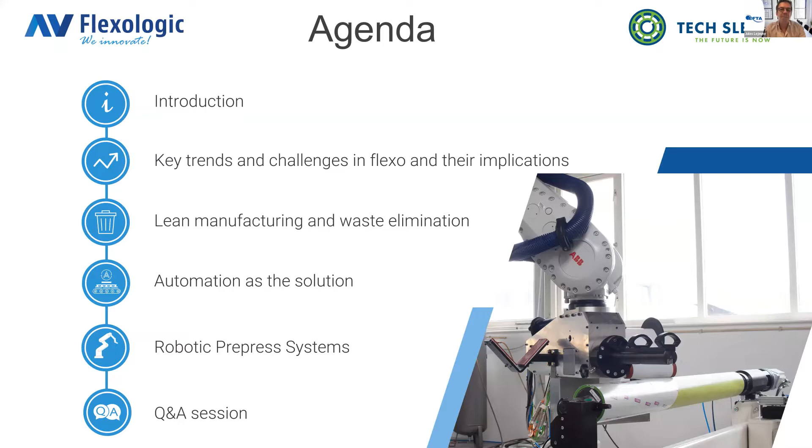As a quick introduction, AV Flexologic is part of the Color Control Group. AV Flexologic itself is a 50-year-old company already, and we are part of a group which is flexo focused. It's a family-owned business by myself and my father, Piet Otten, who many of you will probably also know. We are headquartered in the Netherlands. We have sales and support offices all around the world, from Thailand, US, Spain, Italy, etc. We have a large part of our production in Eastern Europe, in Cluj-Napoca, Romania, where we are quite deep in our own supply chain. We're also building a new facility there.

So we have AV Flexologic, all flexo, which is distributing consumable materials in the Benelux, Germany, and UK mainly. Then we have Tech Sleeves, which is a new company, 5-6 years ago we started it. We are producing and selling flexo sleeves worldwide. Then we have Leapfrog, which is a 3D printing business, the only one that's not flexo based, but still somehow printing.

We are based in Alphen aan den Rijn, obviously in the Netherlands, which is quite convenient for customers visiting us from all over the world, because it's quite close to Schiphol Airport. When they're, for example, on their way to Marcel from W&H, they stop by AV Flexologic on the way there, if they fly into Schiphol.

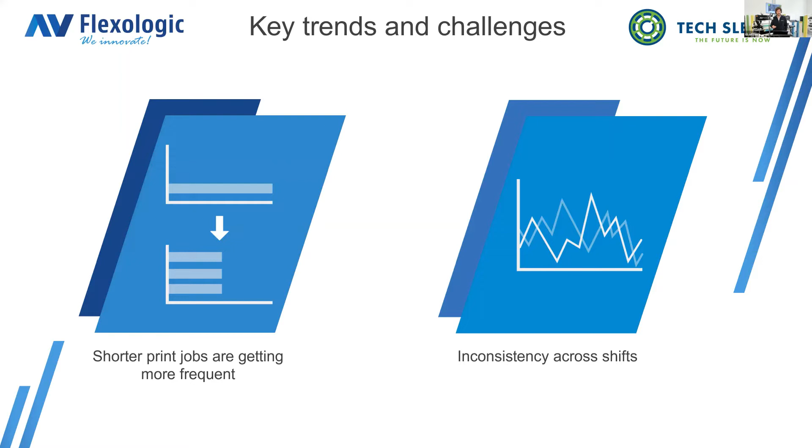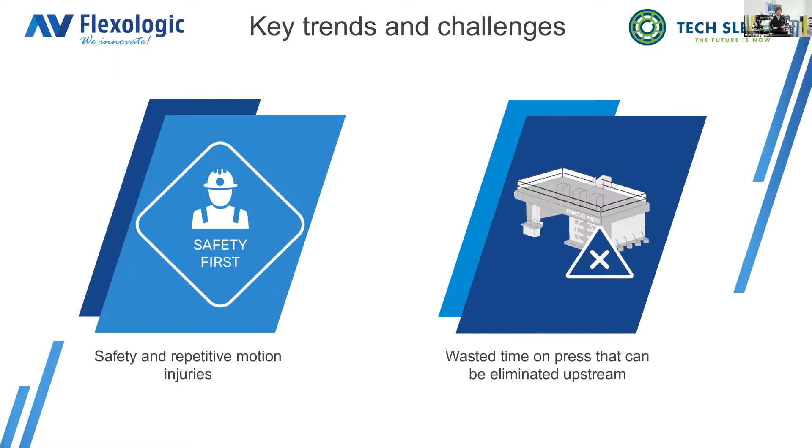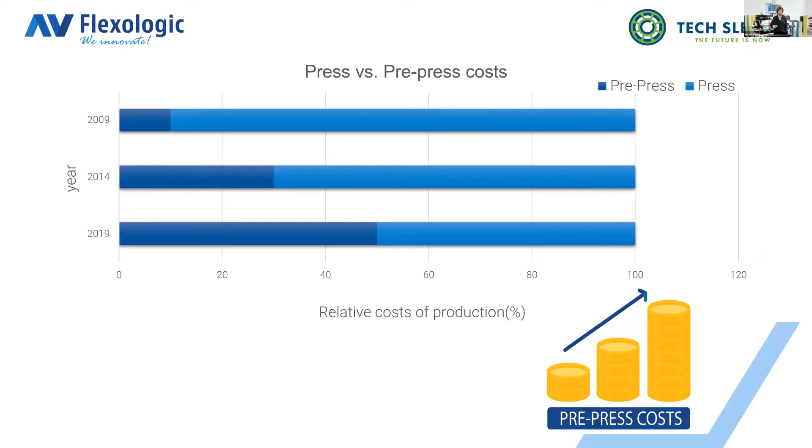What we've identified as key trends and challenges: we see higher quality demands from end customers. Lead times on print jobs are getting shorter, but shorter print jobs are getting much more frequent. This can result in inconsistency across shifts, because more people are needed in the pre-press department. At the same time, the staff is aging and retiring. It was really a skill in the old days to mount a plate, and those higher skill levels are getting harder and harder to come by. Putting pressure on the pre-press department also leads to safety and repetitive motion injuries. Putting more through a pre-press department can also result in wasted time on press that can be eliminated upstream. The relative cost of production over the years of pre-press versus press is growing due to these trends, and as a result, the mounting department becomes the bottleneck.

Now, incorporating into our basically business culture, both from a production and from a product technology standpoint, we really focus on lean. Many people ask, what really is lean? We say lean is simple, because lean is learning to see waste in any type of business process and eliminating that waste through continuous improvement. So we teach and train our people to see waste, and also we teach ourselves to see waste in our machines, how our machines operate.

Every second counts in production output. If you really look closely, most business processes are 90% waste and only 10% value-added work. When you look at what is non-value adding versus value adding, we try to optimize the value adding work and eliminate the non-value adding work.

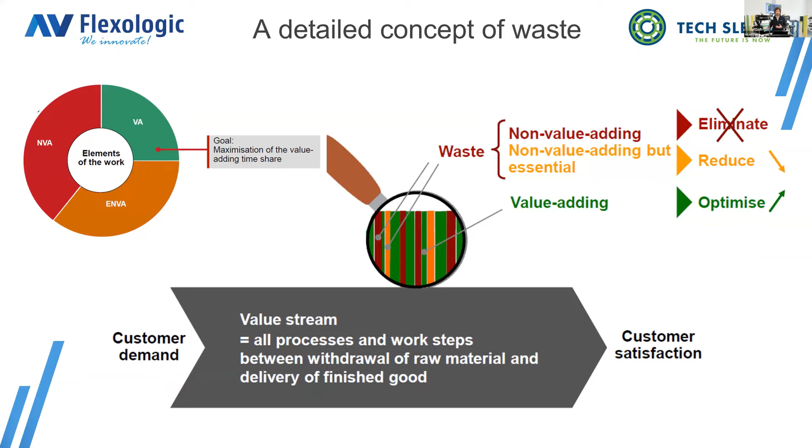When we look at a current value stream for a pre-press department in, let's say, a traditional manual mounting operation, when the customers or pre-press staff are mounting plates by hand, the total production lead time per sleeve is quite high, and there's also potential for rework because the positioning of the plate is operator dependent.

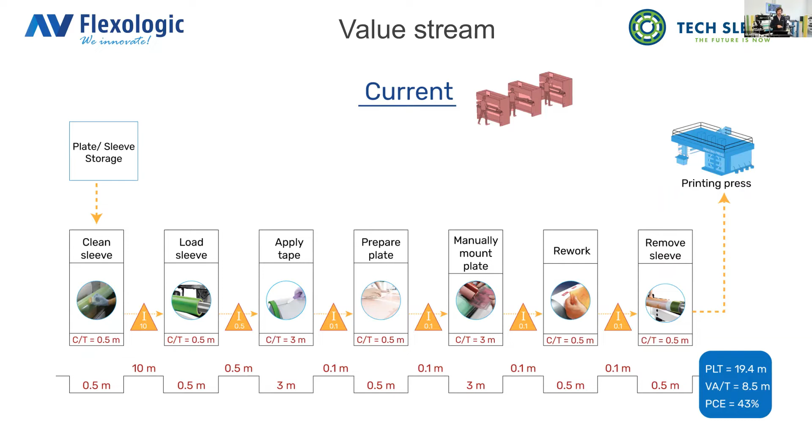When you compare a traditional manual mounting value stream to an automatic mounting value stream, you really see that you cut your time sometimes by even 70 to 80 percent of a manual mounting process, and you really increase your value adding time per operator.

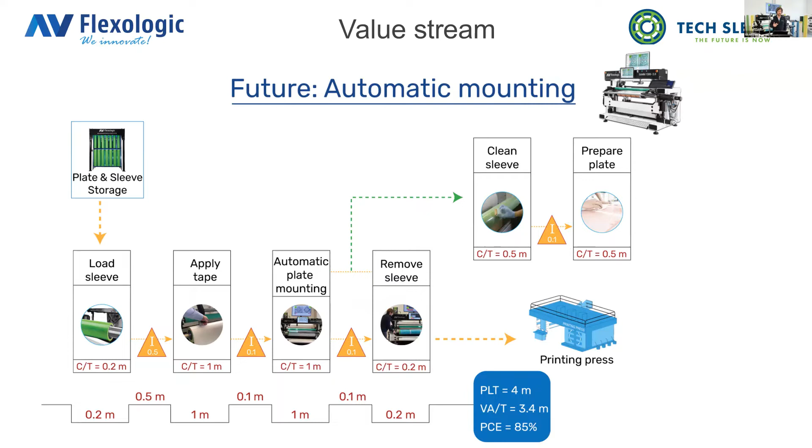Again, what is waste in your production? We have, for example, mounting mistakes which cause press downtime and require excess processing. Then the operator has to pull the sleeve from the press and go back to pre-press, and during that time the press is waiting for that sleeve to come back.

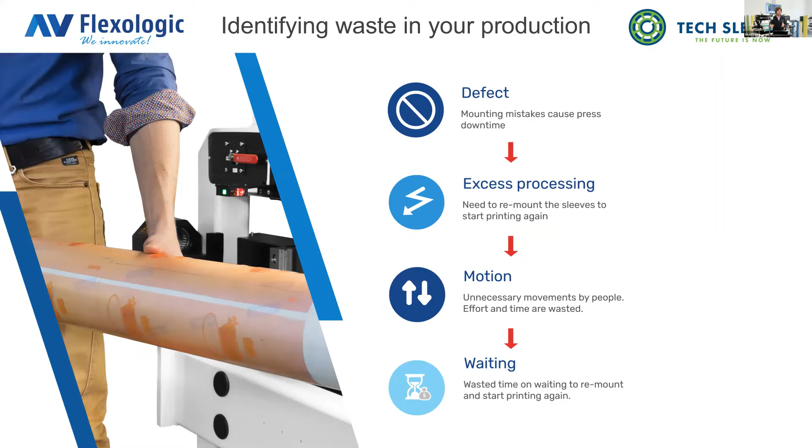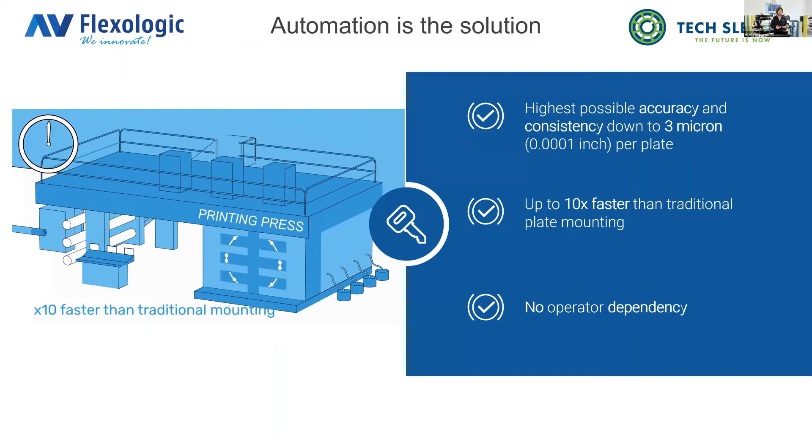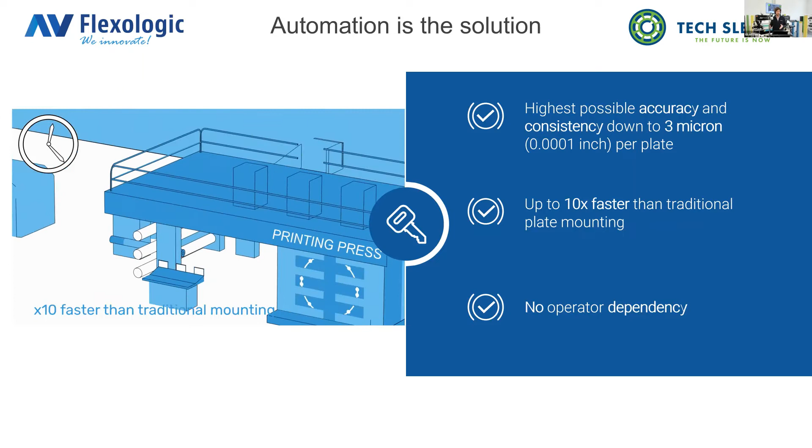We present automation as a solution. Automating creates the highest possible accuracy and consistency. Our latest machine, the FAMM 3.0, the third generation fully automatic mounting machine, is able to position individual printing plates down to 2 or 3 microns, which is very, very tight. It's up to 10 times faster than traditional manual plate mounting, and again, you have no operator dependency. We will show more in detail the fully automatic mounting machine in the next slides.

So we really present automation as a solution to eliminate waste in the pre-press department. You eliminate press downtime due to mounting mistakes, increase your productivity per operator so you have less operator time required per mounted plate, increase your press startup speed by reducing changeover times, and reduce waste material as well.

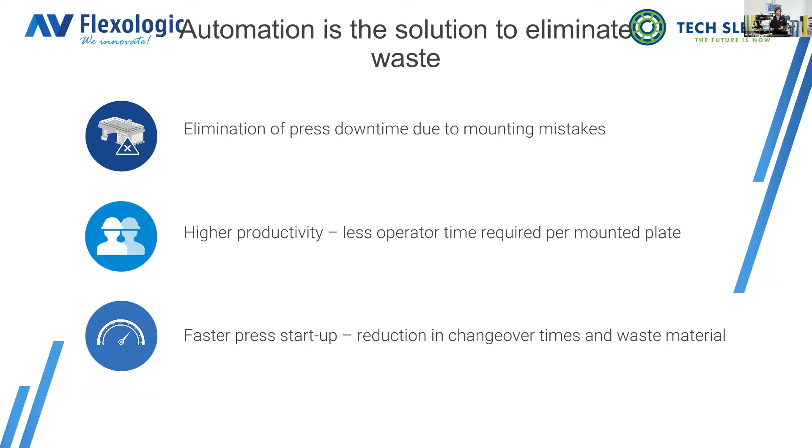At the same time, with automatic mounting, on the machine you see behind me, the SAMM 2.0, you have detailed quality control and reporting. So after the mounting is done, you can also take a snapshot and a measurement of the mounted plates, so you can make sure that they are within specification before they go into press.

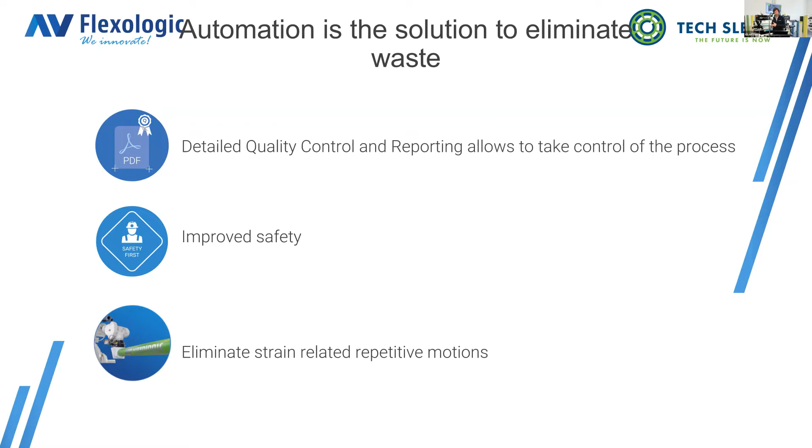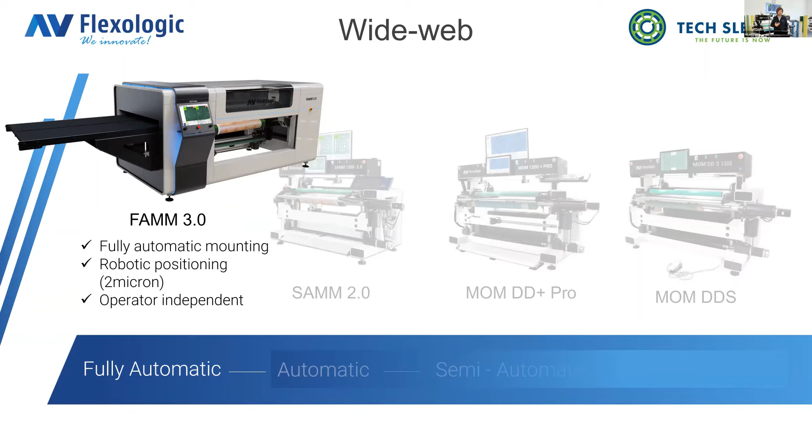And this is our full range of wide web flexible packaging plate mounting machines. Starting with the FAMM 3.0, third generation fully automatic mounting machine, we have over 100 of these machines worldwide. Robotic positioning, 2 micron accuracy, operator independent, every 30 seconds you mount a plate.

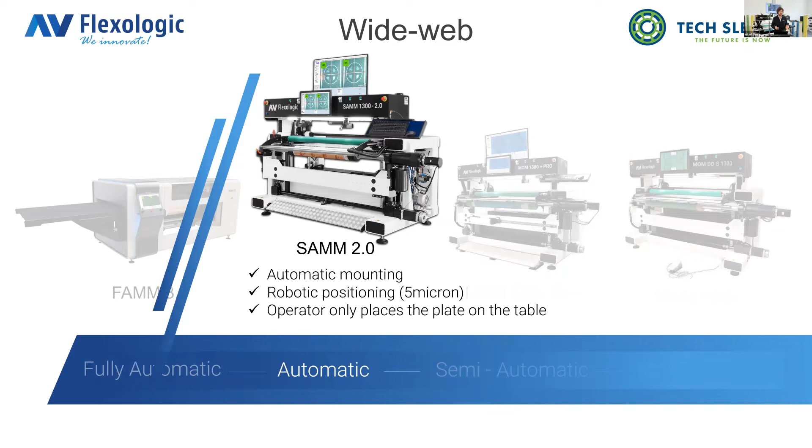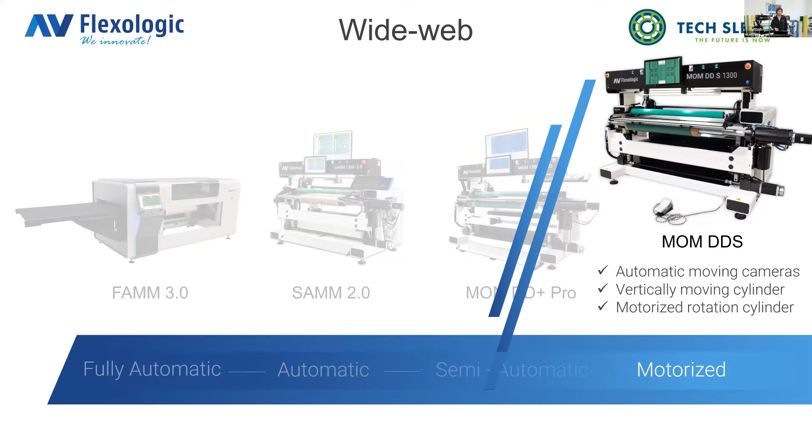The SAMM 2.0, this is our bread and butter machine. This is really suitable for 80 to 90 percent of Flexo printers. It's an accessible machine, and it obviously does automatic mounting. The operator really only has to place the plate on the mounting table, the machine takes over, does the positioning of the plate, and mounts the plate fully automatically. Then we have the industry standard manual mounting machine, the MOM DD Plus Pro and the MOM DDS for the entry level. So we have really quite a wide range of equipment.

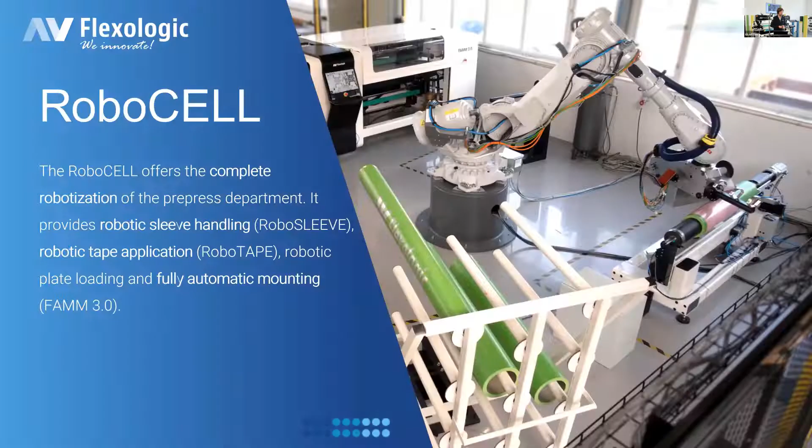We also have, on the narrow web and corrugated side, different options of mounting machines. But if we really look at the wide web flexible packaging innovation, the Robocell offers the complete robotization of the pre-press department. So we have sleeve handling, tape application, and plate loading, as well as mounting those plates on the FAMM 3.0.

So the FAMM 3.0, which I showed you before, this machine can be placed into the Robocell, and the robot can be loading those sleeves into the FAMM. We have different configurations of the Robocell.

Standalone robo tape, that's level 1, where we're actually manually loading the sleeve into the system, but you have the advantage of fully automatic tape application. We have spiral tape application, so basically you start at the same angle as you finish, so you have zero tape waste. There's no cutting onto the sleeve, there's no air inclusions, and obviously no operator manually applying that tape.

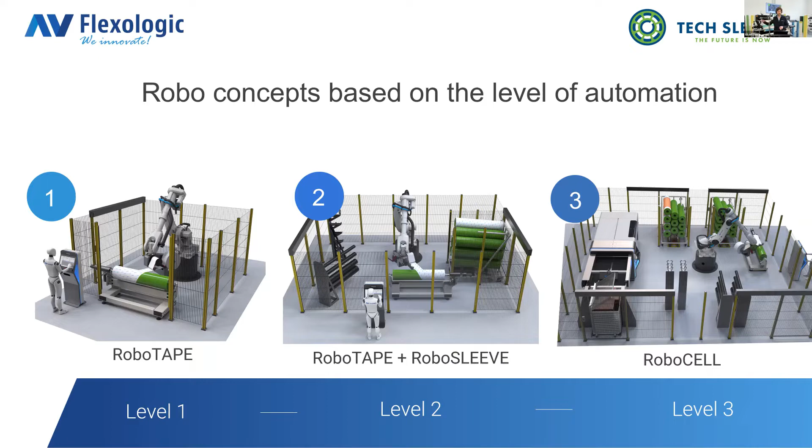Then the next level is robo tape plus robo sleeve. So the operator puts a sleeve cart with the full job into this cell. The robot takes the sleeve and automatically applies the tape, and when the sleeve is taped, puts that sleeve back into the sleeve cart. Then level 3, the full Robocell, the operator is putting the sleeve cart into the system. The robot takes the sleeve, applies the tape, puts it in the mounting machine. The mounting machine mounts the plate, and then the sleeve is placed back into the sleeve cart, fully taped and mounted.

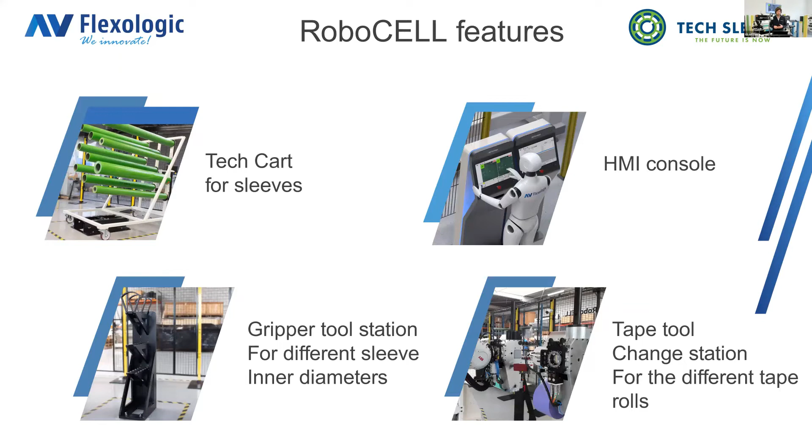So yeah, some features which I just explained. I'm going to quickly show you a video of the different features and options of the Robocell.

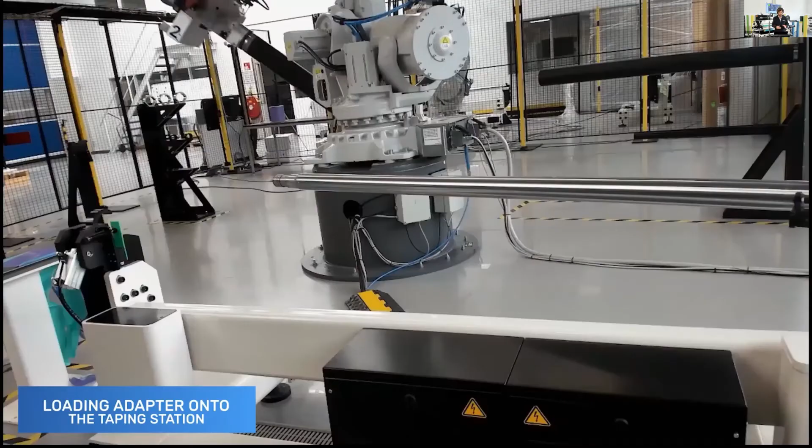So it can also load the adapters. We have a separate adapter station for different internal diameters and lengths. The system can also accommodate different lengths of sleeves within the system. So if, for example, you have a 1300 and a 1700 wide press, you can accommodate both into the cell.

So now it's loading the adapter into the taping station. We also have different taping tools, so for customers which have multiple tape hardnesses and densities, for example if you have your process colors and your solids, you need a different tape. We can real-time change the tape tool using a tool change system, as you can see here. We have the ability to go up to 4 different taping tools.

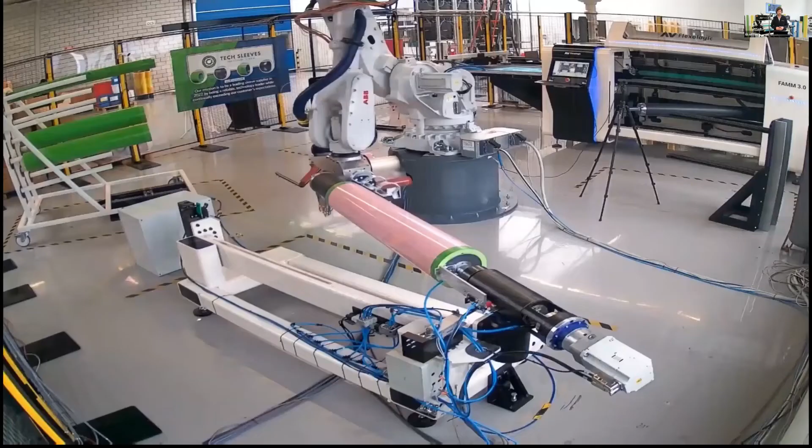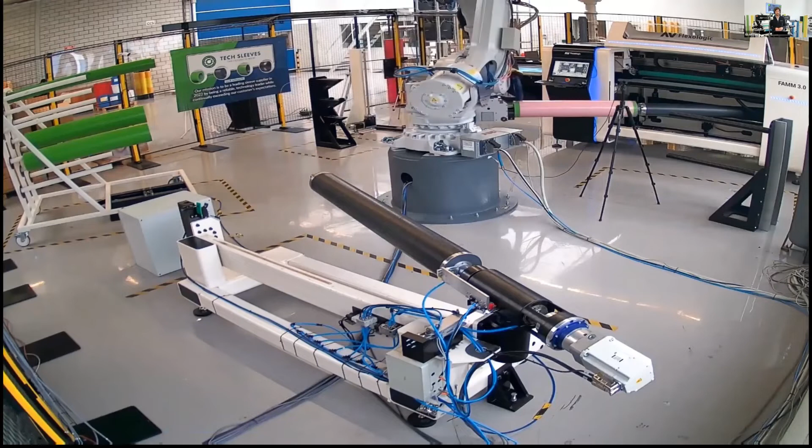So now you see the RoboSleeve part actually loading the taped sleeve into the FAMM in the back. We see this system has become very popular, especially in areas where it's hard to find operators, customers which have 3, 4 presses or more, and which are growing essentially.

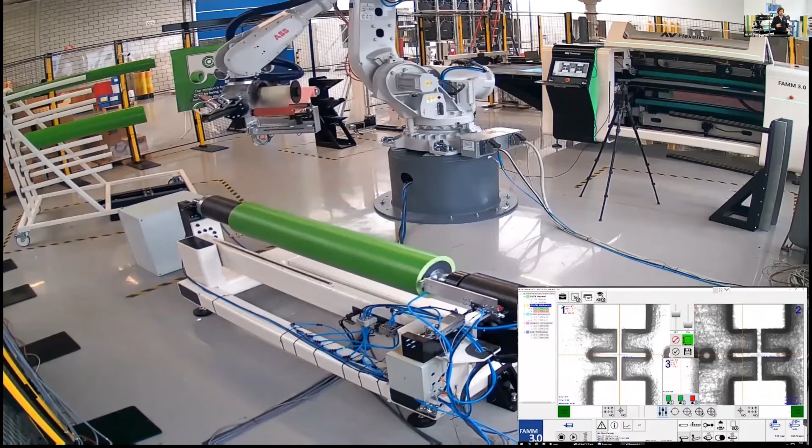You can see the robot again putting a sleeve onto the taping station, and in the back you see the FAMM actually mounting plates. So while the robot is handling sleeves and applying the tape, on the other side, the FAMM 3.0 is mounting plates. So the system, depending on how many plates per sleeve, can do basically every 1.5 minutes a sleeve, applying tape and also mounting plates.

So now you see the robot applying the tape in the spiral form. So we're actually also rewinding the backing foil back onto the robot, as you see. We're cutting the tape at an angle. So the trick is we are cutting through the tape, but not through the liner. And thereby we are able to also make sure that the tape is on the right location, front and back of the sleeve. We can also tell the robot where to start and where to stop.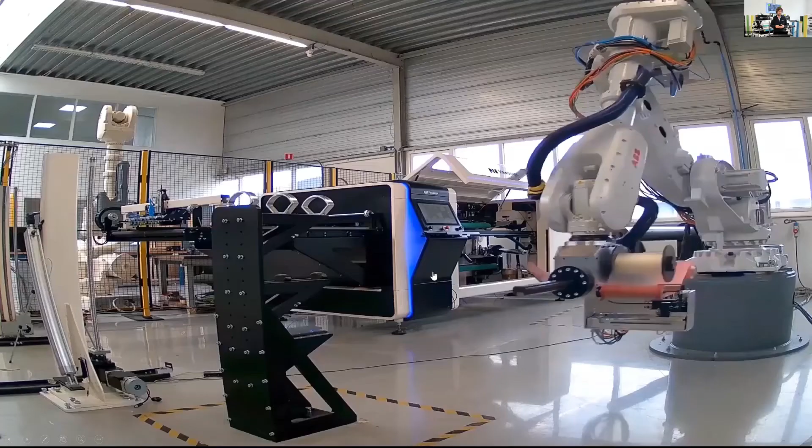So in case you have maybe a 3-plate job, but only for one color, only plates on the edges of the sleeve, you can skip the middle part of the tape. We are now also an official ABB robot integrator because of this development, and there's more possibilities also for the future to develop further.

So we're proud to have won the FTA Flexo Innovation Award. We are gunning for more in the years to come. We have the 4th system going to be installed this year, and so far the feedback has been really excellent.

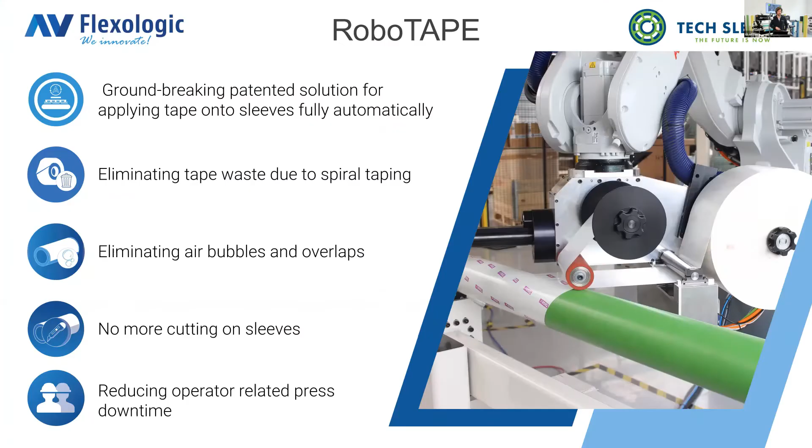So some advantages, as I said before, eliminating tape waste due to spiral taping. So you use one tape width, which is a division of the mother roll of tape. We have certified both TESA and 3M for this robot. You eliminate air bubbles, you don't have any overlaps, you have no more cutting onto the sleeve because you're doing the tape cutting in the robot itself. So you reduce a lot of operator related, also press downtime.

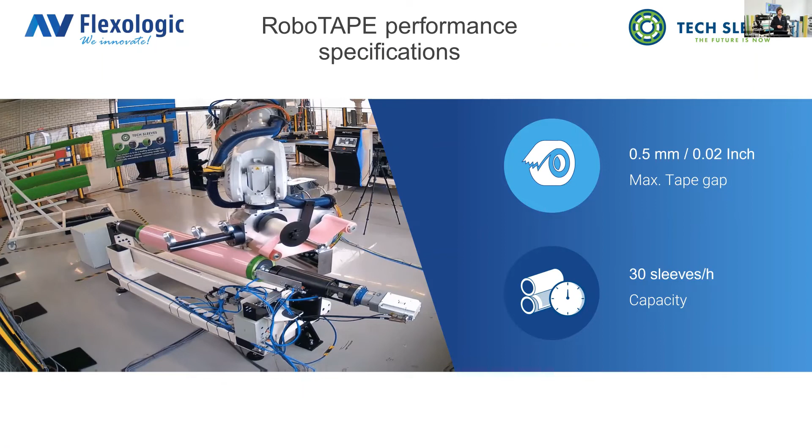The gap, this was one of the big challenges for us, to make sure that the gap with the spiral is within 0.5 millimeters. We have done many press trials at various customers, both in Europe, but also in USA. And we have found that as long as the maximum tape gap is 0.5 millimeter, you do not see it in the print. You actually only see it at 1 millimeter, and that's why we say 0.5. That's on the safe side. And actually the gap closes when you start printing as well.

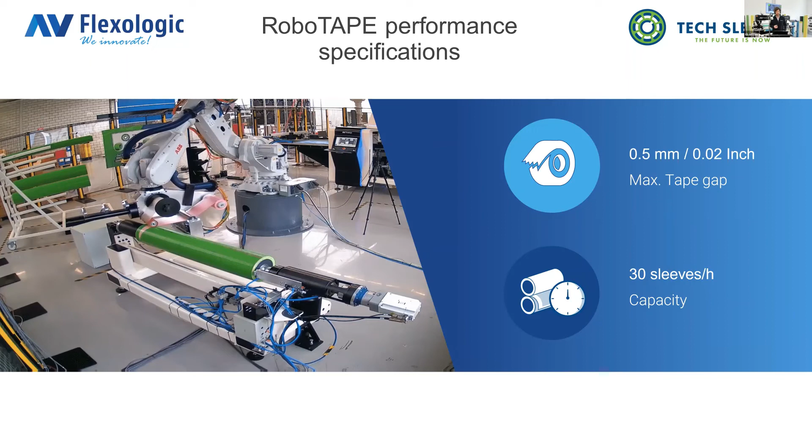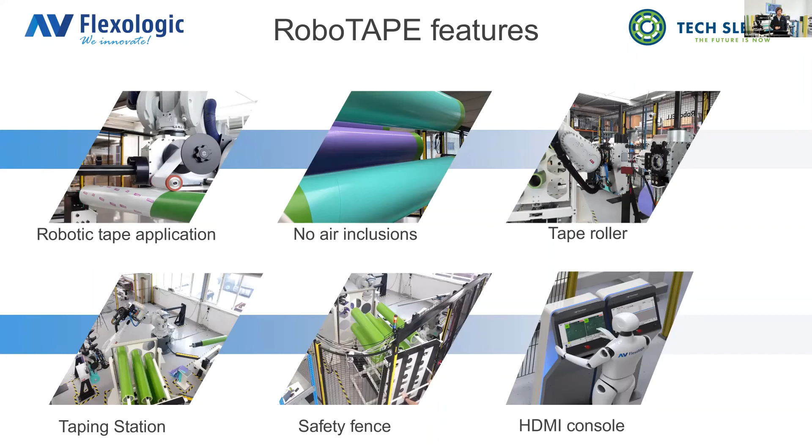So in a nutshell, this is really the next level for us in innovation. But at the same time, it feels that we're only just getting started because there's now so many requests for further levels of automation with robotic sleeve handling, for example, sleeve storage, that we are very excited to go to the next phase in Flexo.

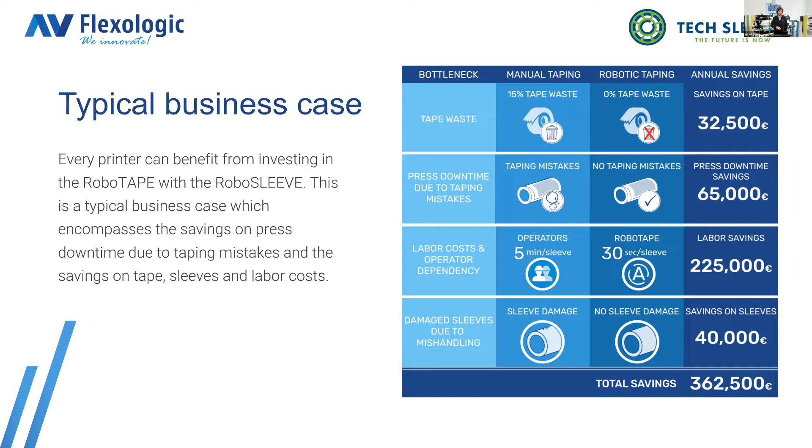Typical business case of RoboTape, RoboSleeve, for example: you save a lot on taping mistakes, operator labor time, essentially, because the machine doesn't require an operator to apply the tape, which can sometimes take a few minutes per sleeve, and reduce sleeve damage. We all know those sleeves which have been cut with a sharp blade, and you see a lot of sleeve damage. You totally eliminate that, so you really also save on your sleeves. So ROI can be, let's say, 12 to 24 months in some cases.

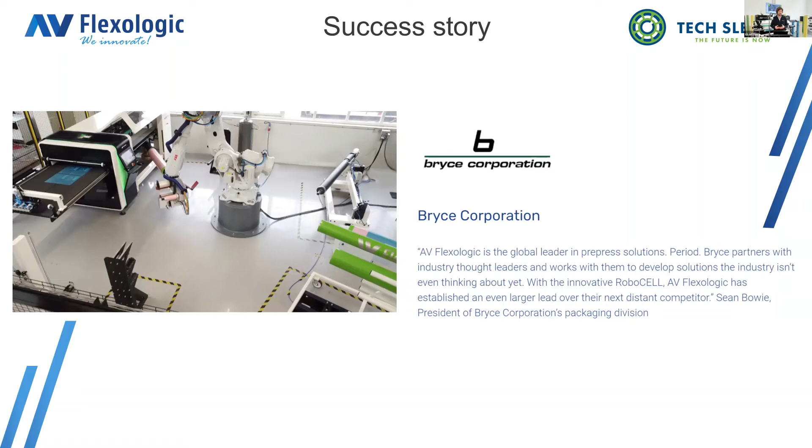Bryce Corporation is a large US-based company. They actually have purchased the first RoboCell, and that system is now running there. And we've been very lucky to have them as a development partner, and we are very proud to have them as a leading customer. André?

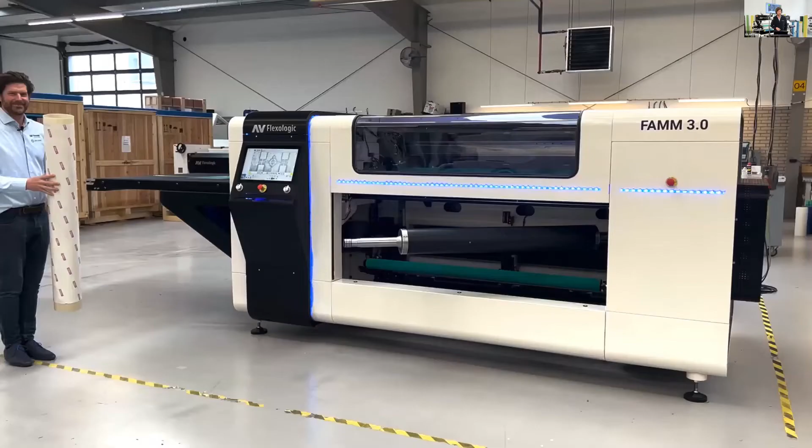Perfect. So this is the FAMM 3.0, third generation fully automatic mounting machine. And actually this video we just took yesterday, so we're just going to quickly show you. It's very easy. Load the sleeve.

Press start, and you see the plates are on the conveyor belt. So in case this is a standalone FAMM 3.0, put the plates on the conveyor belt, load the sleeve. The system does the rest. So it's using automatic cameras. We've actually used very high-speed linear motor cameras in this patented machine now.

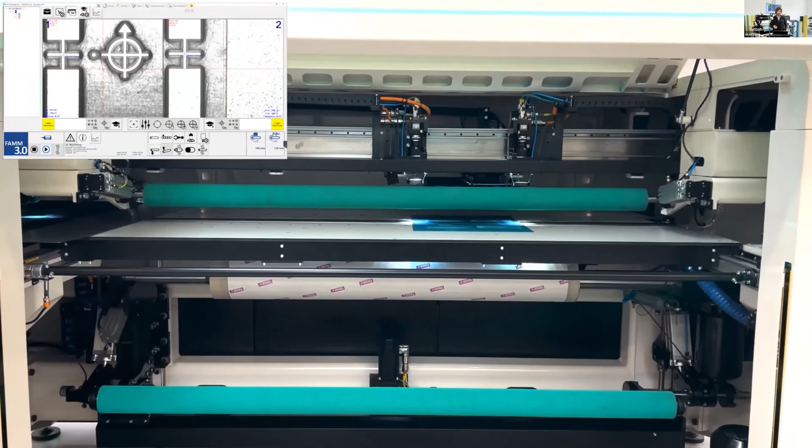As you can see now, the machine is positioning the plate. Using image recognition, it's measuring the location of the mounting marks. The robotic mounting table is correcting that position. Then the machine starts to mount the plate. Cylinder comes down. There's a second pressure roller which will mount the top part of the plate, and at the same time, the next plate is already being brought into the machine. So you can really see the speed. Every 30 seconds, the system is mounting a plate within a few micron accuracy without any operator intervention.

Again, plate is in position, cylinder comes up, top pressure roller comes down, will mount the top part of the plate, drops down, mounts the bottom part. And the nice thing is with automatic mounting, after the mounting is done, you can also do a fully automated quality check. So then the sleeve goes back up, cameras go back to the mounting marks, and then they make a snapshot, but also a measurement, and they tell the operator that the plate is mounted within specification.

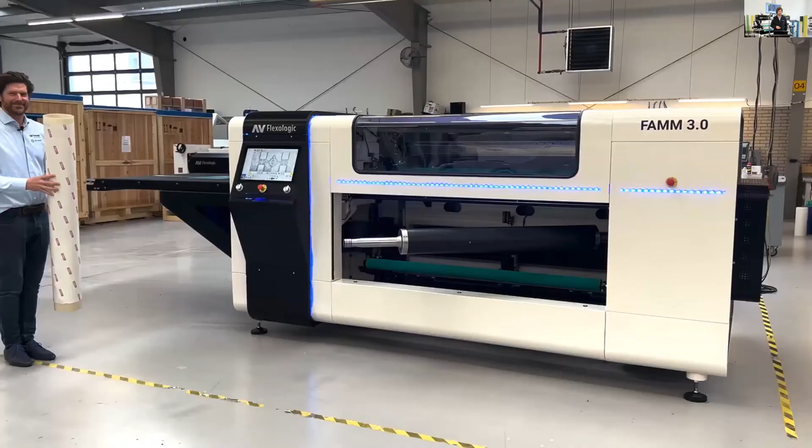So you never have a situation where a job goes to press and the plate is not mounted correctly, because you're actually able to, first of all, make sure that the plate is mounted accurately using automatic mounting, but also doing a quality check of that mounting process. So again, 30 seconds mounting time per plate. This is, like I said, the third generation fully automatic mounting machine. So we've incorporated a lot of new things.

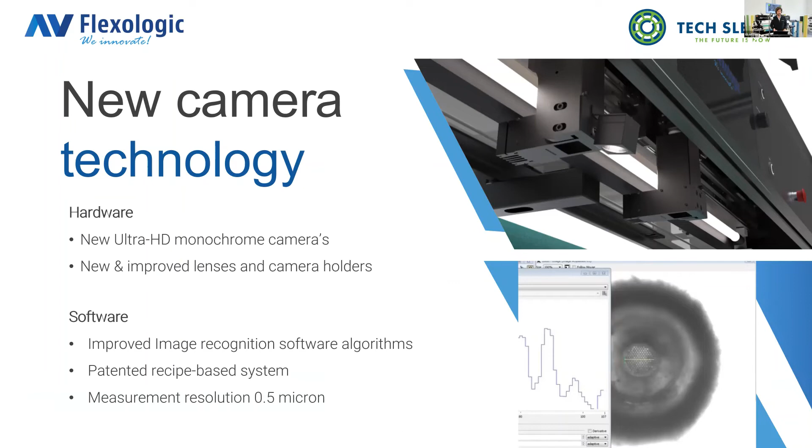Actually, the machine has been redesigned from the ground up, both mechanically and software, camera-based system. We have a lot of patents now on our image recognition recipe-based system. We also have a digital calibration patent, which makes sure that plates which are long and narrow are always still mounted accurately top and bottom. We have a pickup unit which is using vacuum cups, linear motors which are able to position the cameras extremely fast, but also with an extremely high absolute positioning accuracy.

We have a split conveyor belt on this machine, which is able to identify if you have a QR code or a data matrix code on the bottom of the plate. So the machine can also do plate ID verification. So when the plate is coming into the machine, you can check that it's the right plate, so you can mount it in the right location. And if, for example, you're putting the wrong plate from the wrong color, it will tell you, and you make sure you don't have a wrongly mounted plate going into press. So again, saving that precious press downtime.

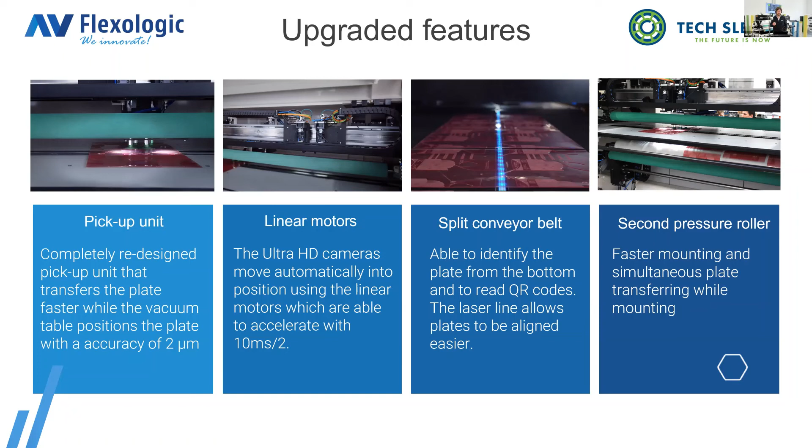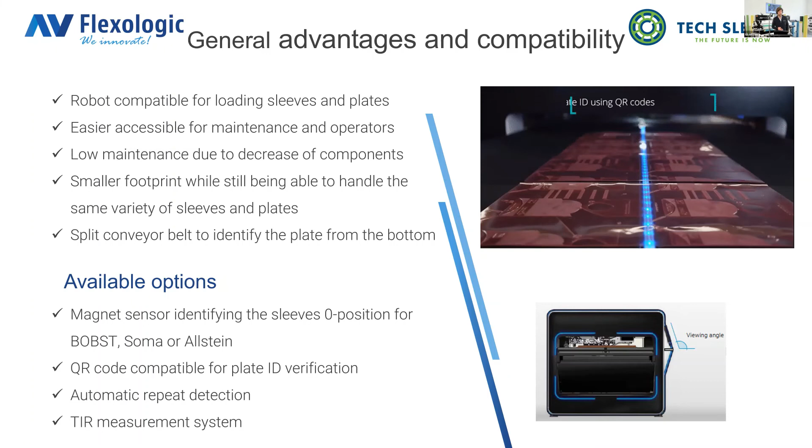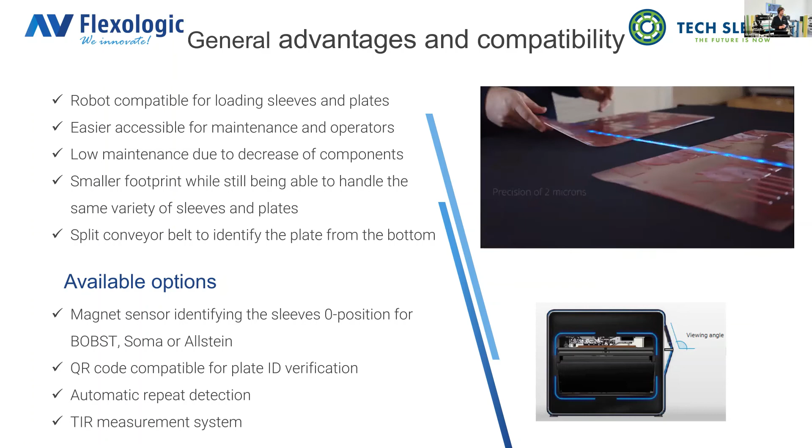So what we explained before, the machine is compatible with the robot. It's also backwards compatible. So if you get a FAM first or robot first, the two can always be synchronized at a later stage. QR code compatibility, like I explained, for plate ID verification, automatic repeat detection, and also a magnet sensor available for identifying the zero positions for the sleeves, and EasyReg, last but not least, to make sure that when you're using the W&H EasyReg label, the machine can also detect that center mark, which the press then picks up. So you basically mount from the EasyReg label and you are good to go.

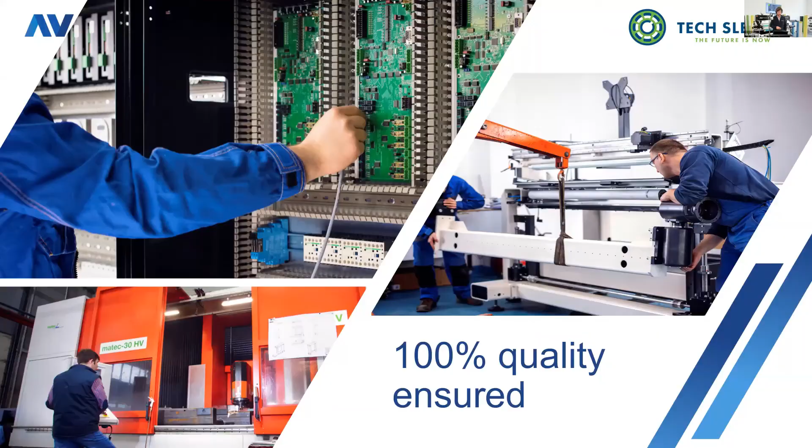We have complete in-house production. So we have now 7 automated CNC machines for our production parts, our frames. We're also building a new factory where we have powder coating in-house. And the reason for this is that we want to make sure that our quality is 100% ensured. We are not dependent on sub-suppliers for part availability. And we have been very lucky to have been in this position in the last 12 to 18 months because we had no real supply chain issues as a company. So we have deep in-house production, so we can ensure quality and lead times.

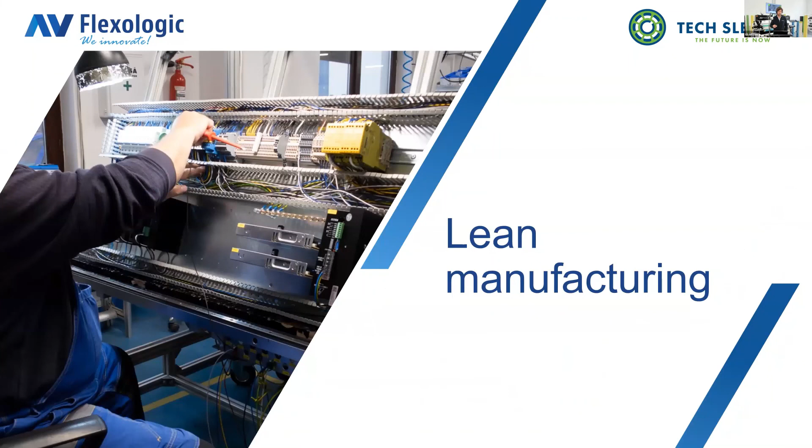We have a high focus on lean, really from the shop floor all the way to the top management, or rather the other way around. It's really important for us in the company. So we have sales representatives all over the globe as well.